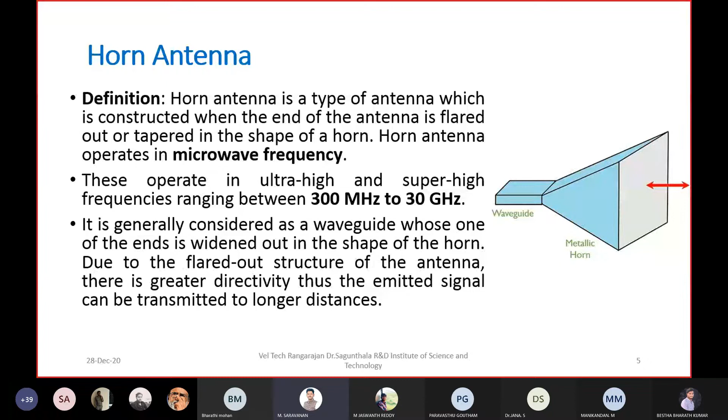Is my voice audible, please? Someone? Yes, sir, it is audible. Audible, sir. Thank you, thank you.

Thank you. But practically, if you take now for high gain antennas, you cannot increase this horn length. You cannot increase to infinite length or very high length because of the huge structure. You cannot incorporate or combine this device with other RF gadgets. So this puts the limitation. However, you can use this kind of antenna for moderate gain applications. So the main motto is to design this antenna today, and also along with SIW technology, substrate integrated waveguide technology, followed by this design.

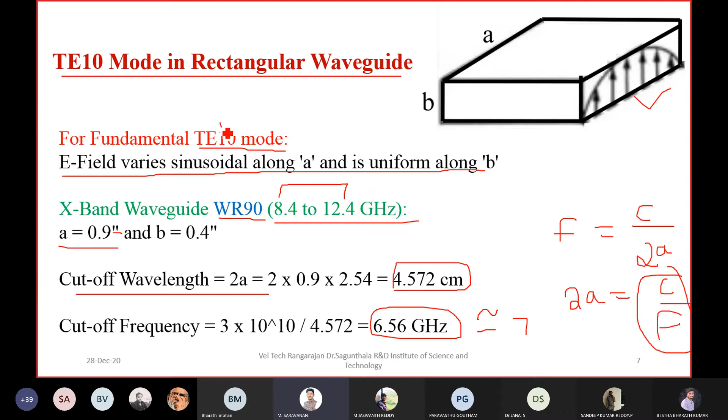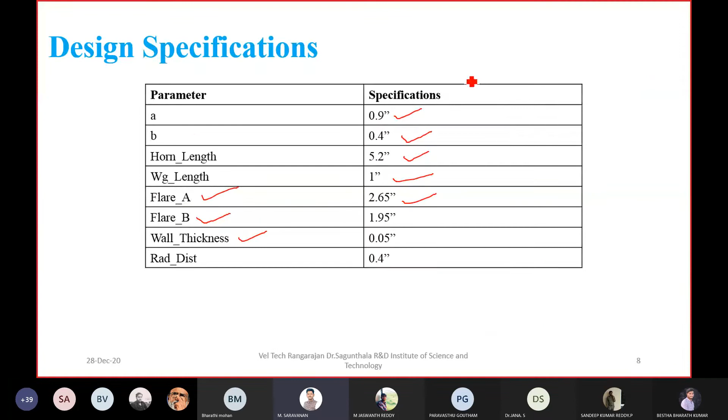So based on this equation, A and B, based on the previous equation for X band, the design specification is given here. This is the flaring angle along the A direction, this is the flaring angle along the B direction, and this is the wall thickness. It is a metallic conductor, so definitely it will have some thickness. So that thickness is given, and the remaining parameters are given: horn length and waveguide length. Total horn length is nothing but the total length of the horn.

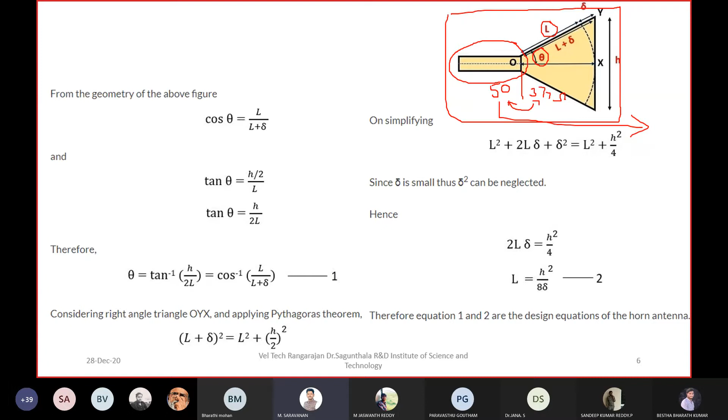Okay, so we will directly go to the tool. 1 minute.

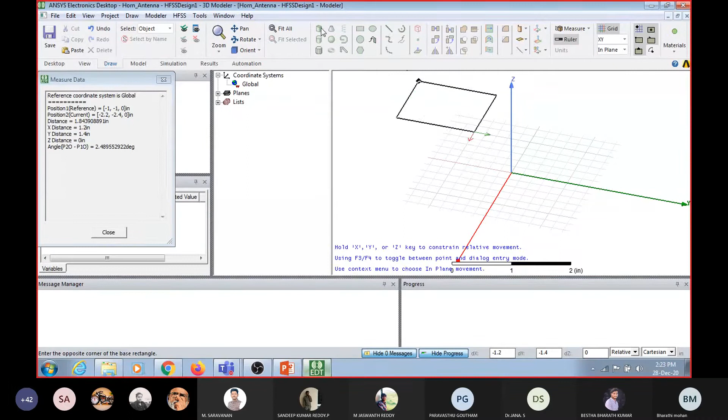The third step is, what is the thing we need? We need first a waveguide, then we need a flare structure. So two structures are there. First we have to design a waveguide, then the metallic horn or the flare structure. First I will design the waveguide. The waveguide is of square or rectangular shape, so you can select it from here and draw it like this. It is given in the 3D structure.

So this is the first structure. If you are creating it now, you can see under Model, Solid, this is a solid structure. Under that, the material is vacuum, and the name of the object. It is better to change the name according to our understanding. If I want a waveguide, I can change it to WG, so next time I don't have to search, because if you are designing a very big model, lots of structures will be there and it will be difficult to identify them. So it is better to rename it.

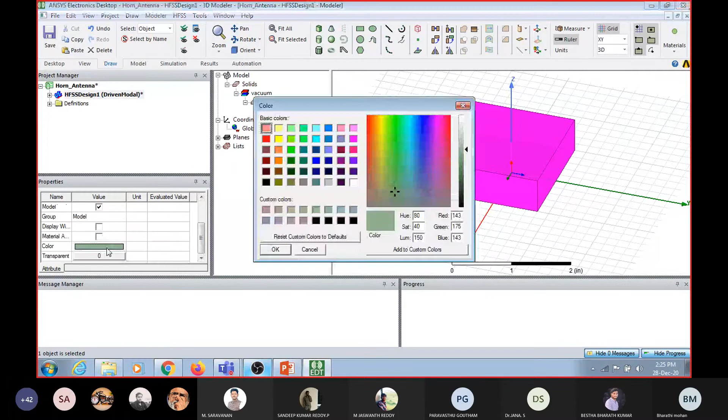So I rename it as WG, and you can also change the color for better understanding. Here you can see it is opaque, so I can change the transparency also, to 80% transparent. These are called attributes, used to change the attributes of the object.

Similarly, the bottom one is used to change the position, which position I want to place it. If I place it at 0, 0, 0, you can see from this position, along the x-axis, it has to grow 2 inches, so from here to here, 2 inches. Similarly, along the y-axis it has to grow 1.8, or if you want 3 inches, it can grow 3 inches. And the z-axis is the thickness. So everything can be controlled from here.

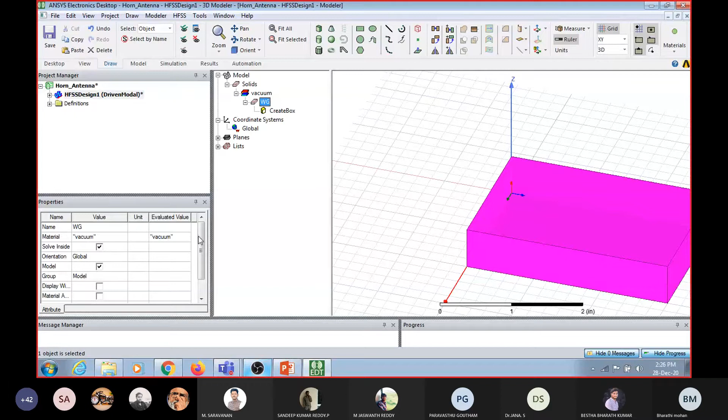So the first thing is the attributes, that is the name and the kind of material. Here you can also change the material, but we want vacuum only. Then the color and the transparency. These are called attributes, and they will not greatly affect the design. The next one is the position and the size. These two controls are required for the entire design.

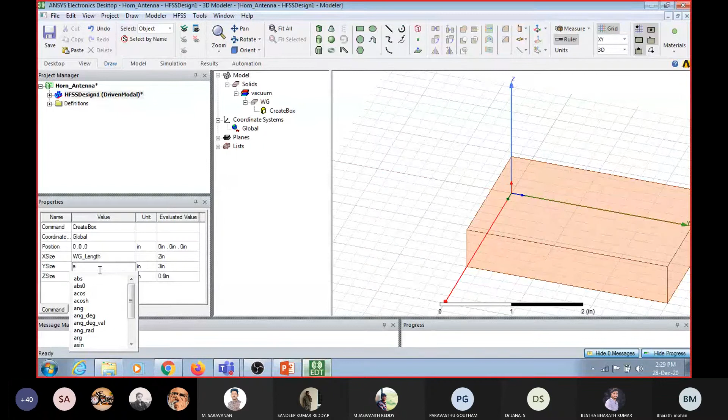Similarly, for y size, along the y size, which is the thickness of the waveguide, I'm going to choose A. I know A is 0.9 inches, this length. This is 0.9 inches. Okay. Similarly, B, which is 0.4 inches according to WR90. So you can say this is A, this is B. I can randomly choose. If I change one, accordingly it will change. No need to go there. That is the beauty of a variable. Once you choose the variable, you select it from here and you can change it from here.

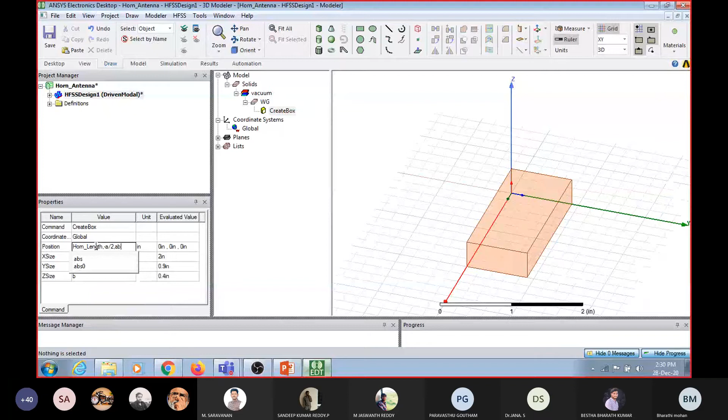Okay. Now the position I want to choose. So the position is waveguide length, not waveguide length, horn length. So I am creating one more variable, horn length, comma, minus a by 2, comma, minus b by 2. I will say why I am choosing this. Horn length is 5.2 inches. Okay.

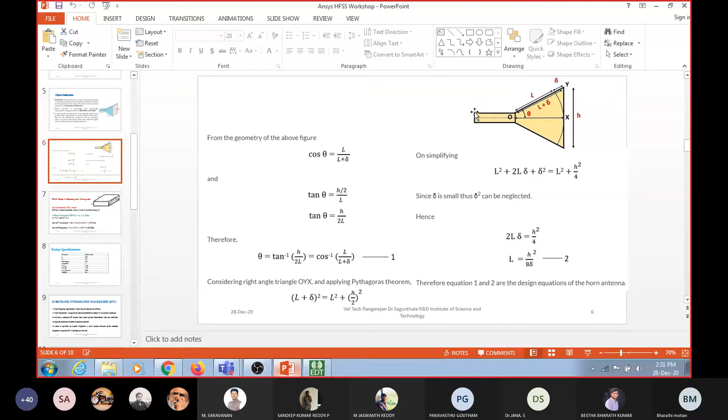So you can see from here. This is the total horn length. From this horn length distance, I am drawing my structure. So with minus a by 2, it will be exactly at half of the distance. Minus a by 2 distance it will move, and minus b by 2 distance it has to move this side. Okay. So that's why I chose this length.

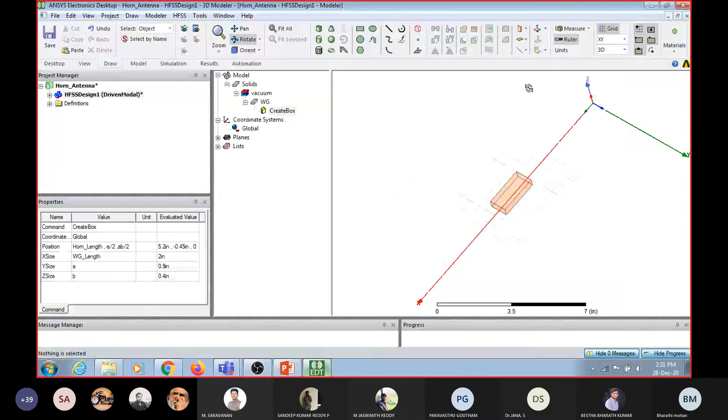Now, the first structure is over. The next structure I want is this flare, this box. Then I have to connect this box with this box, and the entire structure is over. Okay. If you see, this flare structure is perpendicular to this axis. I will draw and explain the difference. If I draw a 2D structure, you can see it is drawn in the horizontal X, Y axis. But I want this to be perpendicular to this axis.

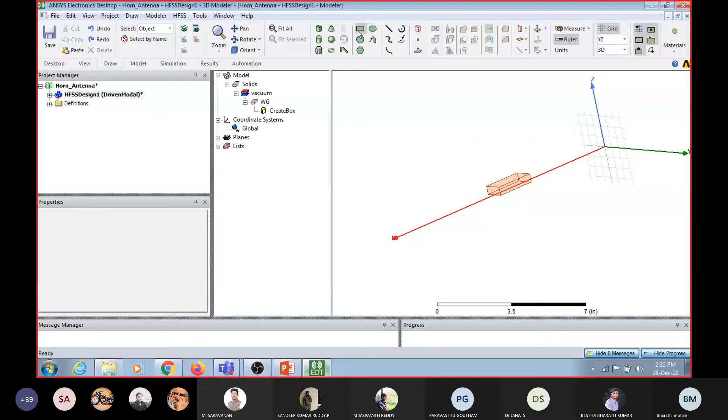So in order to change that, I have to change the grid direction to YZ. You can see this is Y, this is Z. Now the grid direction changes to this orientation. With respect to that, you have to draw. Now if I draw, it will come like this. So according to your structure, you have to change the orientation and direction of the grid.

Okay. Now this is the flare dimension, and I want to know the flare length and flare width. I have calculated it: 2.95 inches and 1.95 inches. So go here, change the y-axis. I already gave it. I took this flare also as a variable, which is 2.95 inches. And the b direction also I am taking as a variable, which is 1.95 inches.

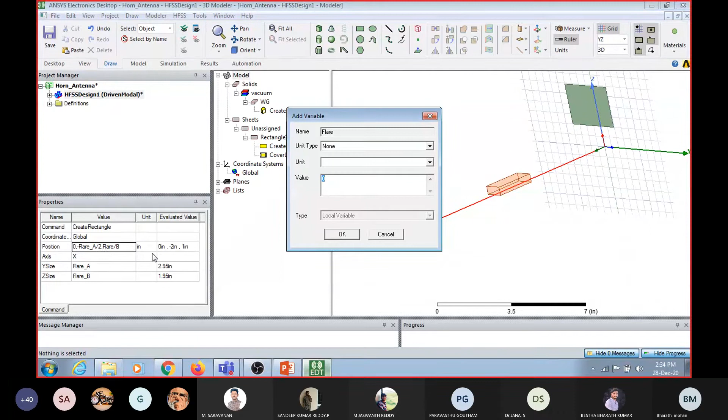The position I am going to choose is zero, because it is in the y and z axis, so the x must be 0. Then minus flare_a divided by 2, so that it will be oriented at the 0th position. Sorry, this is flare_b divided by 2. So you can check it here. Okay, so I have created the flare and the waveguide. Two structures I have created.

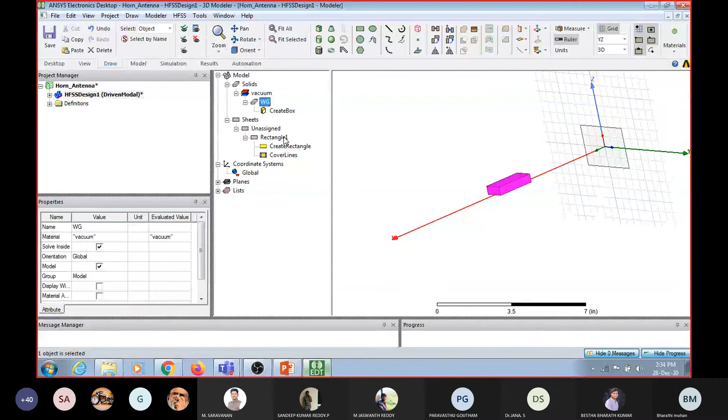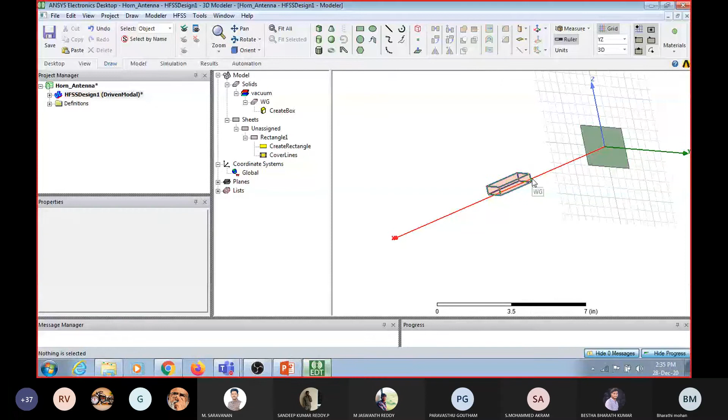Now I want to join this waveguide with the flare. So select both waveguide and flare. Go to modeler, surface; you have to connect it, but this connect option is not enabled. The reason is you can connect two surfaces, but the first structure is a volume, not a surface. This waveguide is 3-dimensional, so we cannot connect that. To overcome this, I have to create one surface in front of the waveguide and connect it.

In order to do that, go to edit, select mode, faces. Now you can select one face of the object. Then go to edit, select object by name. Select which surface you want. I want to select the surface from the waveguide. Choose which face you want; you can select any one. I want this face, because this face and this face only I'm going to connect. Click OK.

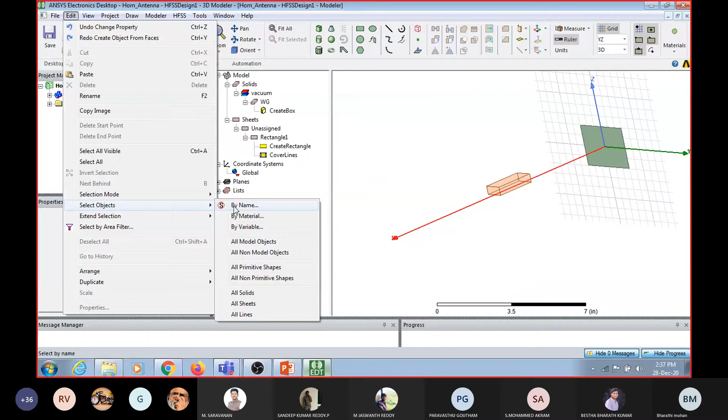Now go to HFSS modeler, surface, create object from face, because I want to create one face from this face. Now it has been created. Press Ctrl, select this rectangle and this waveguide; both will be selected. Go to modeler, surface. Now you can see the connect option is enabled. If you connect it, both will be connected. Okay, once again I will repeat the steps. Go to edit, select mode, faces. Then go to edit, select object by name.

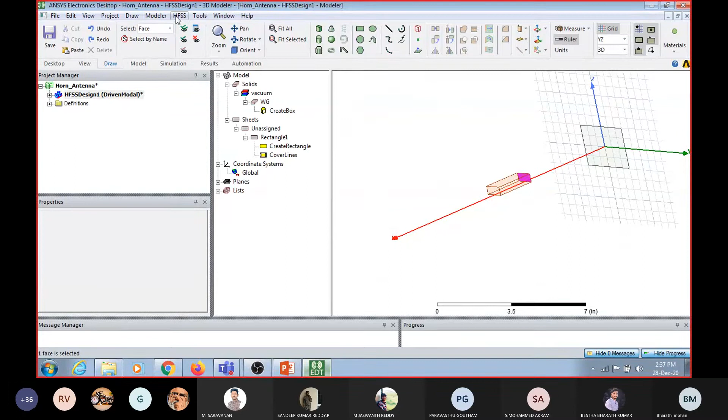Select waveguide, the material you want to select. Select the face you want to duplicate. Click OK. You will be getting this surface selected. Now go to Modeler, Surface, Create Object From Face. The new object will be created from this face.

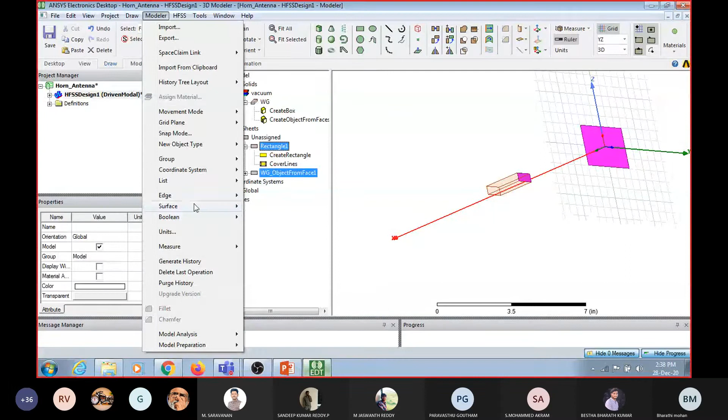Now select both the newly created object with rectangle. Go to Modeler, connect these two. Your waveguide, your structure will be created. Now join all the structure, because these two are detached. You want to join both the structures, so select both the structures by pressing Ctrl.

Go to Modeler, Boolean, Unite, or directly you can go from here or you can go from here. Okay, now the waveguide structure and horn antenna structure are both joined into a single structure.

Okay, now this is a vacuum, and the real horn antenna will have a vacuum inside. Over the vacuum you will have a metallic sheet. So the next step is to create a metallic sheet over this antenna. But you can see that at the opening, there is no metallic sheet. Other than the opening only, you will have a metallic sheet. So I have to create all the surfaces of this vacuum structure except the front face, and then I have to create a metallic structure. So that is the next step.

Okay, so first I have created a waveguide structure. Next I have created this flare surface. Next I connect these two. These are the 3 steps I did. The 4th step is you have to select all the surfaces except the front surface and create a metallic structure.

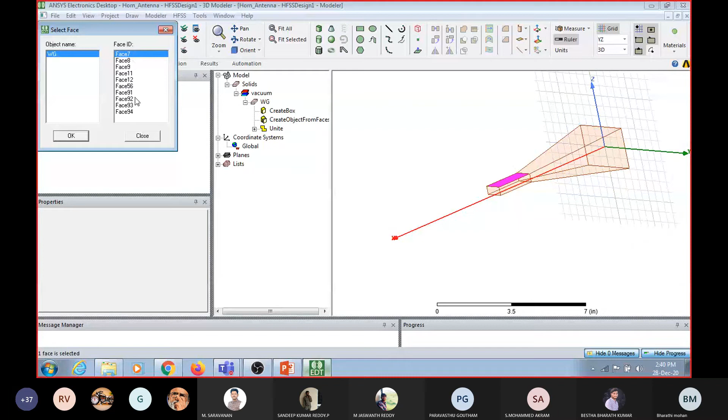So go to Edit once again, Select Mode, Faces. Then go to Edit, Select Object, Select by Name, waveguide, select all the surfaces. First you have to know which is the front face. So face 56 is the front. Other than that, I have to select all. Okay. Now I am selecting all the faces except the front face. Click OK.

Now go to Modeler, Surfaces, Create Object. So now a new object on all the surfaces has been created. Unite it. Okay. Now this is the object which has been created around the entire structure over the vacuum. But this is not a metallic sheet. In order to make it a metallic sheet, you have to select that sheet.

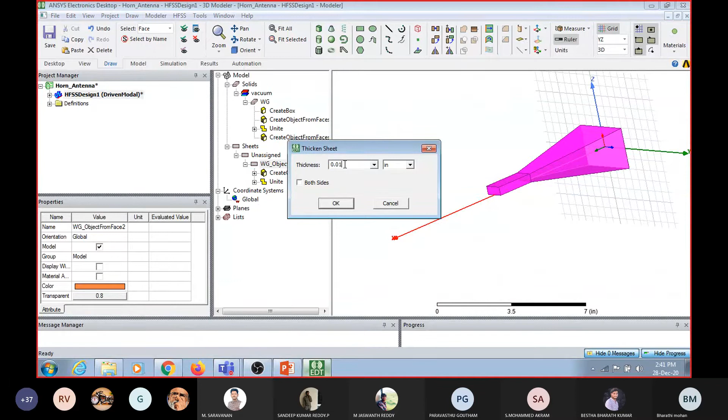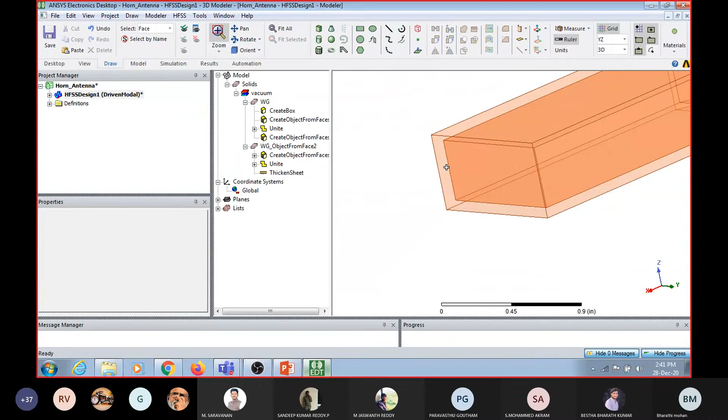Go once again to Surface, Thicken Sheet. You can give what thickness you want. I want to change this also by a variable in Thicken Sheet. This is the new variable I am creating, which is of thickness 0.05. So now you can see a new sheet of 0.05 inches has been created. So this is the sheet.

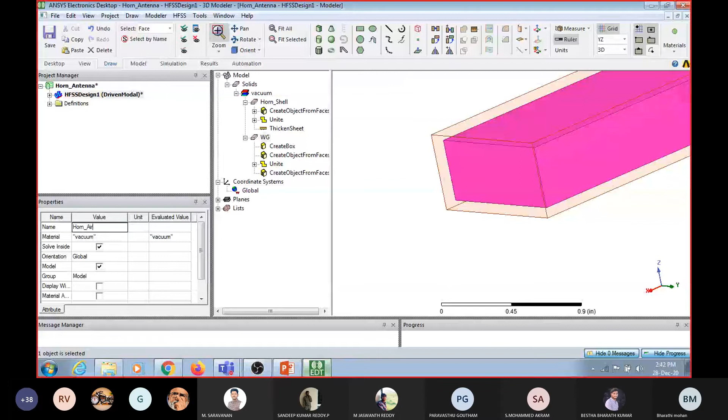This sheet should be a conducting material. So if you click this, the property window is open. You can rename this as horn shell. Okay, so this is the conducting material, horn shell. And the inside is an air medium. So you can name it horn air, air medium or vacuum medium, for your simplicity, for your better understanding.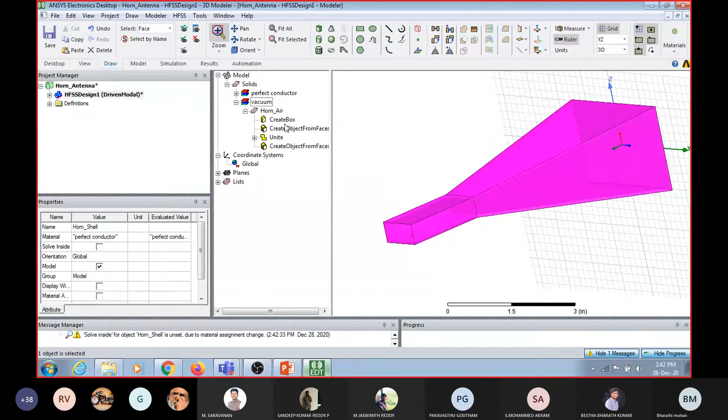Okay, now this is the horn shell. This shell should be a conductor. Go to Material, click Edit, select the type of material you want. I want a perfect conductor. Select OK. Now you can see that under perfect conductor, horn shell is there. Under vacuum, horn air is there. So now the structure is ready.

You have created the structure, but you have not given any input to test the performance or characteristics of this structure. In order to do that, select the structure. Okay, you have to feed the structure. How can I feed the structure? So I have to create a port. Okay.

So select a sheet. I want to give a port here because this is the input side. So rename it to port. So the position, once again the position has to be there. So this dimension is equal to A cross B, that is equal to the dimension of the waveguide. Okay, so you can replace this with A, you can replace this with B. Okay, now the dimension is okay, only the position is varying.

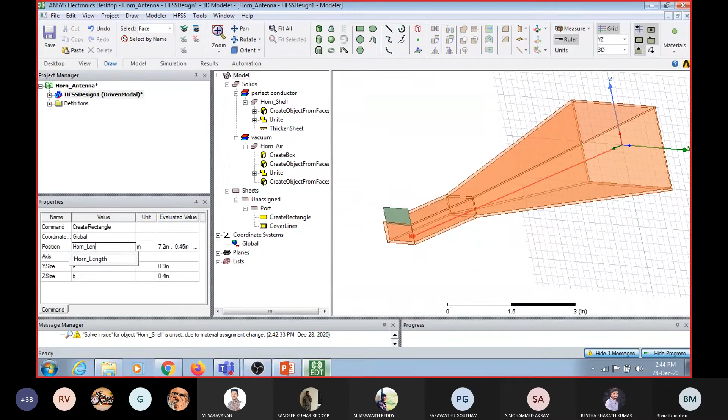So what is this position? This position is nothing but horn length along the x-axis, plus your waveguide length. Okay, so it has to be horn_length, which is already created, plus waveguide_length. So this is the x length. Okay, then the remaining is minus a by 2 as usual, to position it at the center.

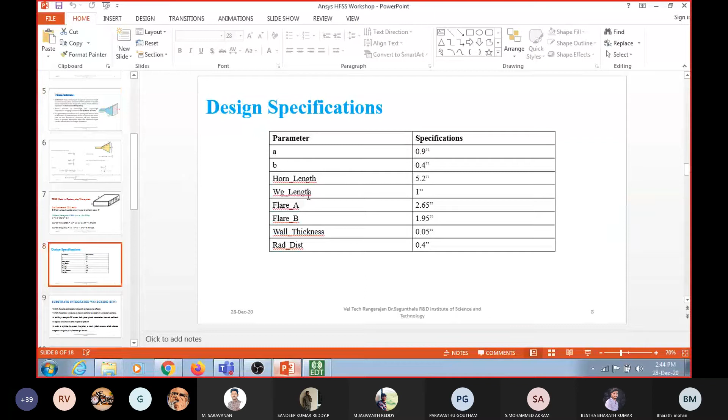So horn length plus waveguide length. Horn length is 5.2. Waveguide length is 1 inch. Waveguide length is 1 inch. Okay.

So this is minus b by 2. There is an error I made. Okay. Now it is perfectly positioned. Waveguide. Now I have connected a connector, but I am not giving any electrical input. So that is called excitation. Okay, just I connect where I want to excite to show that I have created one structure and I am telling the system that this is the point where I am giving excitation. So right click it, assign excitation, wave port, click next, finish.

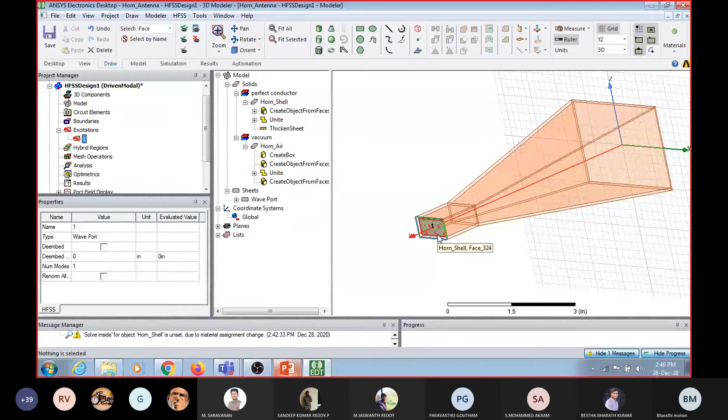Now I am giving an input. You can see, so this is the input point and this is the structure. So I am giving an input, I am giving a structure. The next, the final thing is I have to create a boundary. Okay, boundary means the region around this structure to measure the radiation characteristics, or you can call it in antenna the far field distance. Okay, usually how are we measuring the radiation?

So we place an antenna in the antenna under test place and we will measure the received signal at some distance away from your antenna. Okay, so that is called far field distance and it will be equal to 2D squared divided by lambda. So that is your far field distance, where D is the maximum length or dimension of the structure. Okay, so this is the procedure we are following. Similarly, you have to create a boundary region around this structure in order to measure the radiation characteristics of the antenna.

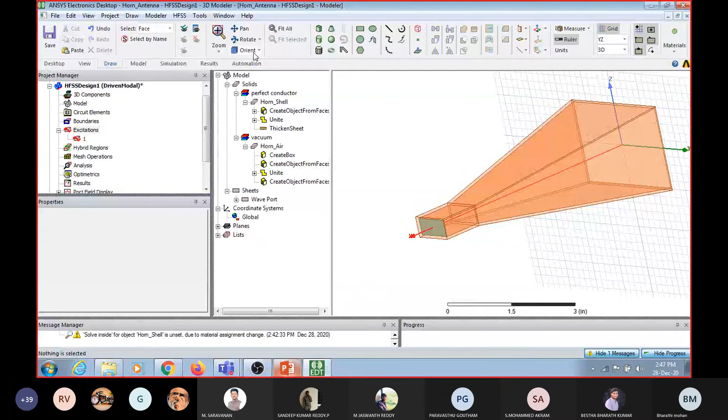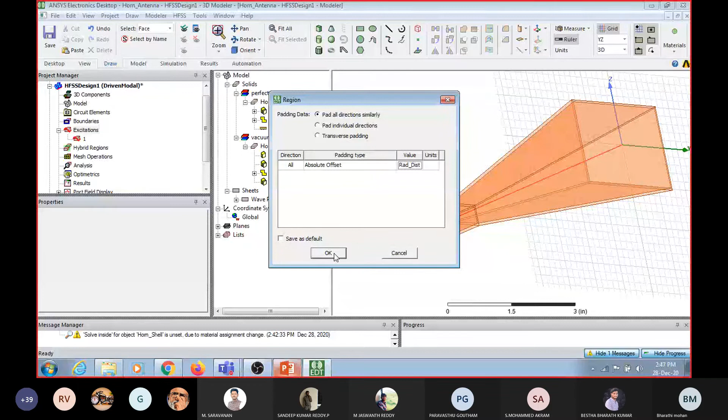So for that, I have to go for draw region, go to absolute offset. So this is the boundary region. So that is radiation distance. This also I'm taking in terms of inches, 0.4 inch. So you can see that the boundary has been created, but I am not telling the system this is the boundary of the model. So I have to right click it, assign boundary, select it as radiation boundary. So now the system knows this is the radiation boundary. What is the field inside it? That has to be calculated. Okay. So this is the procedure.

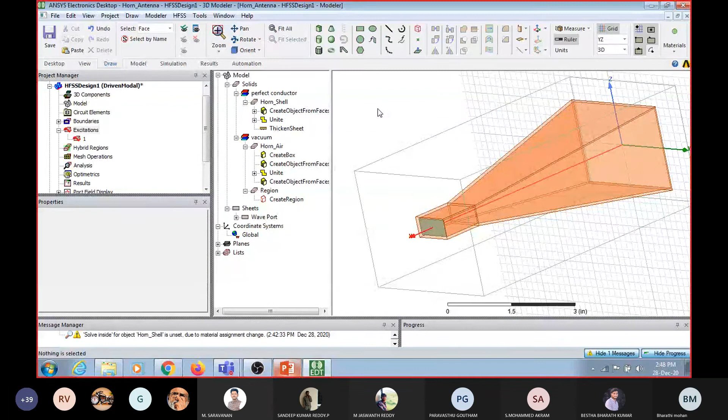So what we are following, we first create a waveguide. Next we create a flare. The third step, we have created a port to excite the model. The fourth step, we have created the boundary to measure the radiation characteristics. The final step is to give the operating frequency. The system doesn't know what center frequency you are designing. So to do that, go to project manager, here analysis, right click it, add solution setup. What is the frequency you have designed?

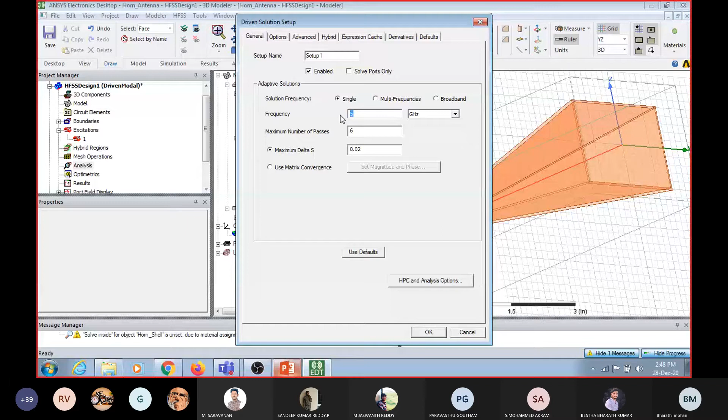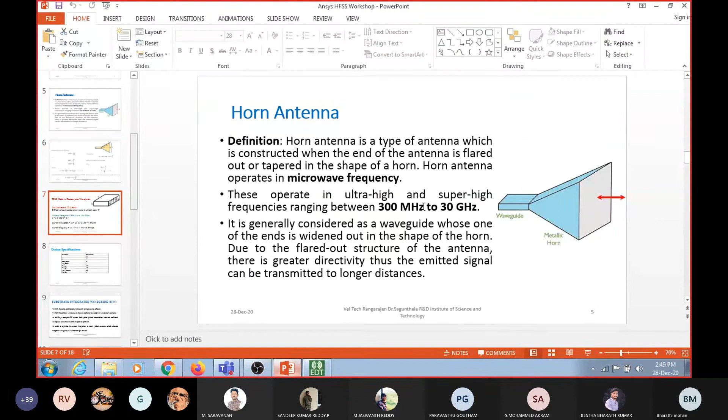So as an engineer, we know what antenna we are designing. Suppose a customer came and asked, I need an antenna at 2.4 gigahertz, 2.5 gigahertz, like that. Similarly, this antenna I have targeted is designed at a center frequency of 10 gigahertz, because you can see from here, the operating frequency is from 8 to 12 gigahertz. That is, it is close to a center frequency of 10 gigahertz. So I am telling the system the solution frequency is 10 gigahertz, but the design may not be exactly correct. It may operate at 10.2 or 9.8 or nearby frequencies.

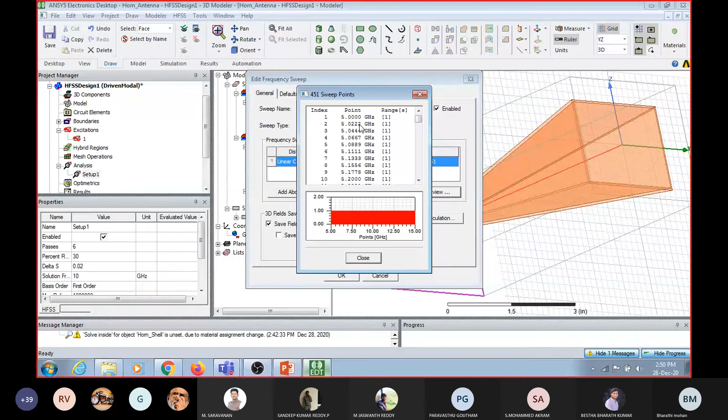So we must analyze this model from the lower band of the center frequency to the higher band. So to do that, right click the setup, add frequency sweep. We tell the modeler to analyze from 5 gigahertz to 15 gigahertz, on both sides of the center frequency, and select fast or any one. Discrete means it takes discrete steps. From 5 to 15 gigahertz, it will check with discrete steps. I can show the preview. So 5.0222 like that, 451 points it will select.

Interpolating means near to the center frequency, it will be very close. Like that, what the sample frequency between these two bands is has to be selected. So for fast, my RAM is only 4 GB, so I choose fast. So click OK. Now the solution frequency is selected.

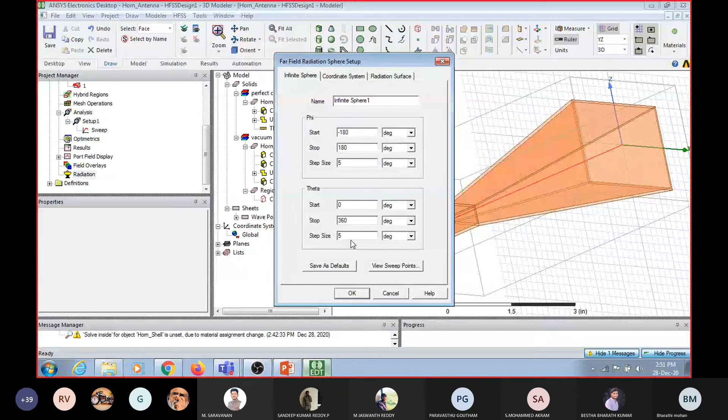The last step is to set up the radiation. In general, the radiation will have two planes, azimuthal plane and elevation plane, or you can call it theta plane and phi plane. This plane you have to measure in terms of 5 degrees or 10 degrees or 2 degrees. It depends upon your requirement. So that can be calculated from radiation characteristics. Right click it, far field sphere I want. Okay, so up to this the model is over.

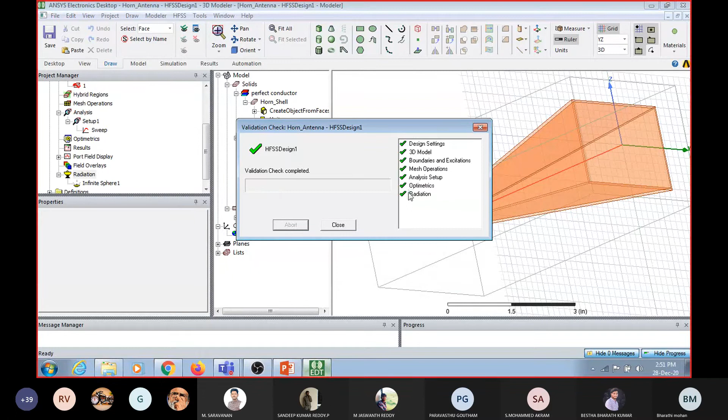Now the only thing left is we have to run it. Go to HFSS, validate whether everything is okay. If it is okay, then go to HFSS, analyze all. So now the system starts analyzing this structure. The progress is shown in the progress window. If there is any warning, that will be shown in the message window. Okay. So it will take some amount of time. So please bear with me for 1 or 2 minutes.

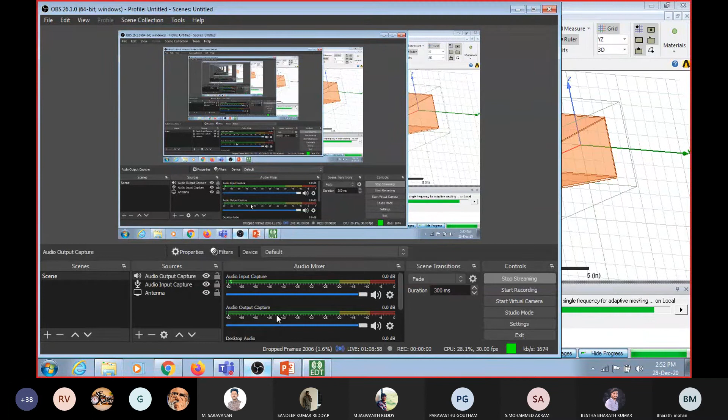So once adaptive pass 1 is over, it goes to the second pass. That means the number of iterations it takes to analyze the characteristics of this model. Okay. So once again, I am telling the procedure.

First procedure is to draw the waveguide. Second procedure is to draw the flare structure. Third procedure is to give an excitation. Fourth procedure is to form a radiation boundary to capture or to measure the radiation characteristic.

Fifth procedure is to analyze or give the operating frequency or center frequency along with its sweep. And the next final procedure is give the radiation conditions. Okay. So this step is common for any antennas you are designing.

Okay, while running itself, you can check what is the field or surface current distribution. So select the object, from which object I want to see the current distribution inside the waveguide, that is in the horn air medium. Okay, select it, right click field overlay, go to magnitude of E field, select done. Okay.

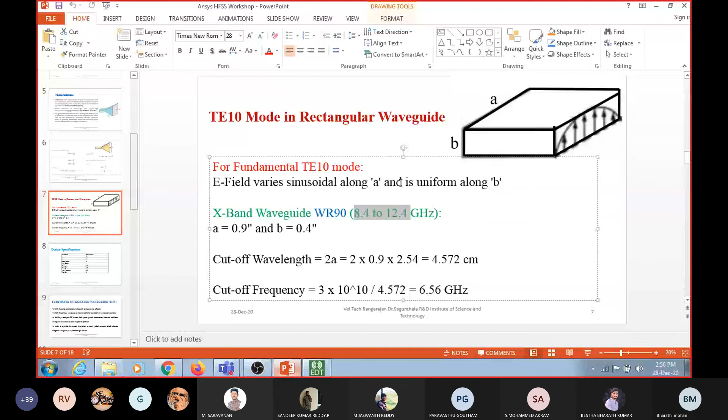Okay, the E field is sinusoidal along A. That you can clearly see here, or I can show it in some other fashion also. Instead of this, I can show the magnitude. Vector. The same procedure, whether you want the surface distribution or the magnitude.

So you can see clearly the magnitude distribution. The fields are varying in a sinusoidal fashion. So you can see the arrow pointing here, like that it is varying.

So you can see here, it is varying sinusoidally along the axis. So this is the mode propagation. You can also check the gain. The gain of the antenna is calculated by far field report.

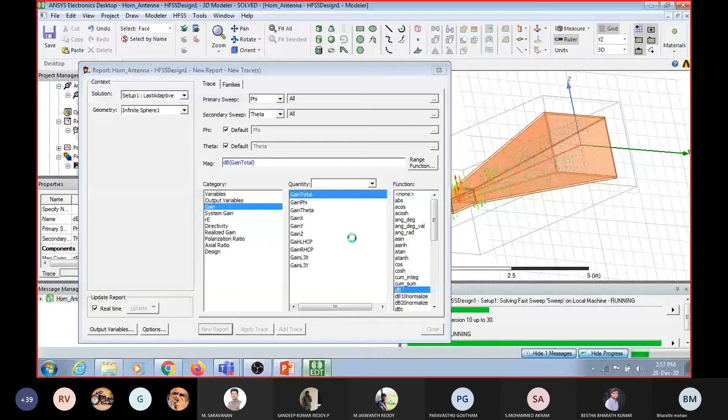So right click results, create far field report, go to 3D polar plot. I want to see the 3D gain in terms of dB. Click new report. You can check it. The new report will be generated.

So it gives a peak gain of 16.48 dB. Okay, it is more than sufficient for long distance communication. That's why we call horn antennas high gain antennas. If you further increase the length of the flare, the directivity and gain will still increase.

But the problem is, the more you increase the flare, the larger the structure, the larger the antenna. So it is difficult to embed or integrate this antenna with the communication system. The communication system size will get increased. Okay, so it will have both advantage and disadvantage.

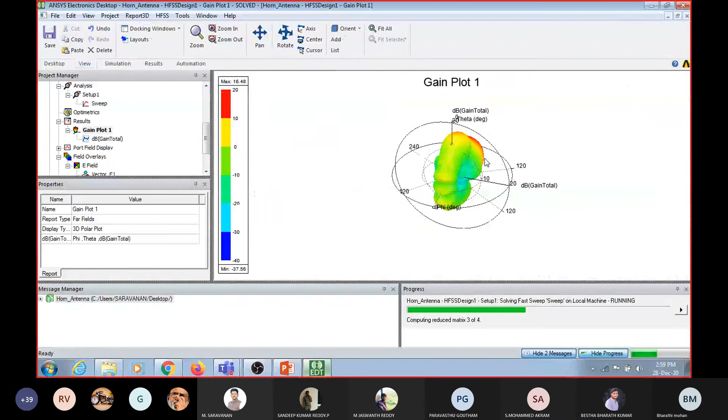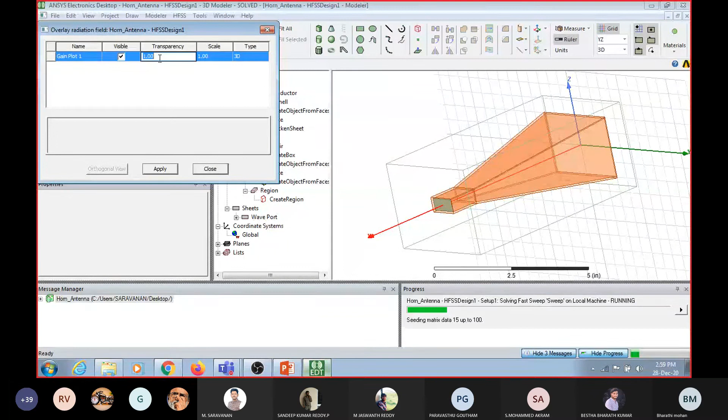So you can check the field here. I think it is not coming here. Scale transparency. Oh, I placed it fully transparent. Okay, so this is the direction. It is pointing most of the energy towards the desired direction. Okay, so this is the 3D plot.

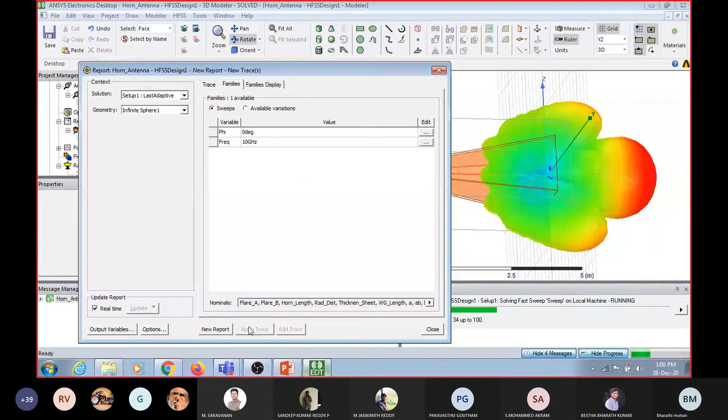Now you can call for a 2D plot also. So 2D plot, dB, 0 axis. Okay, so you can see how the radiation beam of the horn antenna will look. With a marker, you can mark it in the direction of propagation. So it gives a peak gain of 16.48 dB.

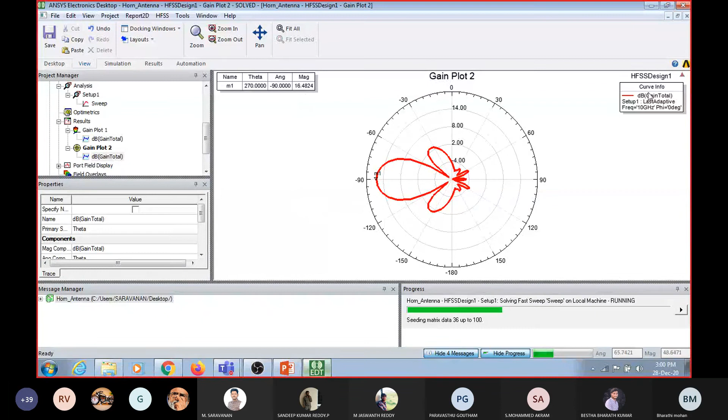And also the operating frequency can be shown, but still the program is running, so it will take 1 or 2 minutes. In the meantime, you can wait. Yeah, it is over. Okay, now we can go for that. Create modal report. The impedance characteristics can be seen from create modal report.

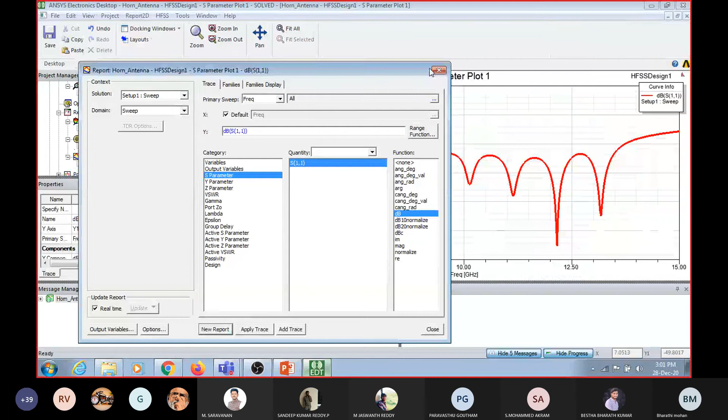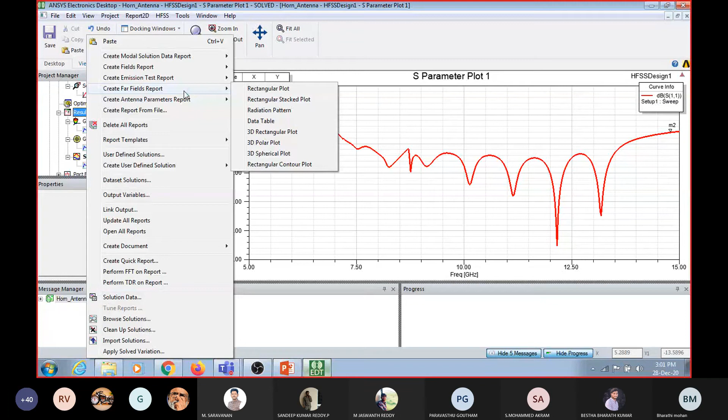So this is the general introduction of this tool, how an aperture type of antenna is modeled using the ANSYS electromagnetic suite. Okay, so the next half of the session will be substrate integrated waveguide. That will be given as the next topic.